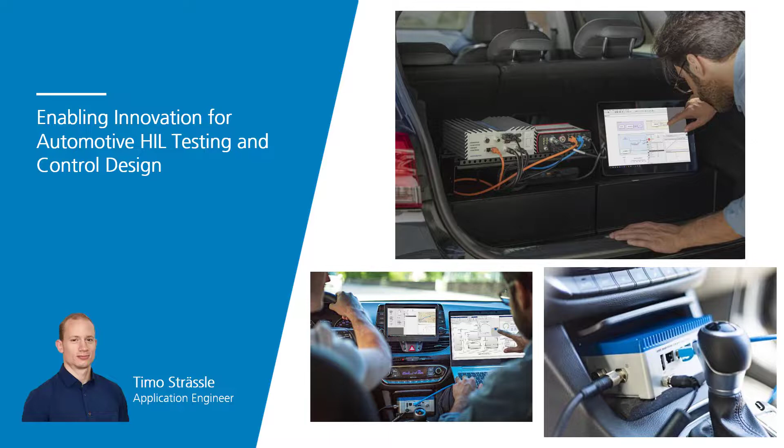Let's start with a great example from the players in the field, which covers many of the topics we want to address today. A brave team of researchers at the Technical University of Munich is developing fully autonomous all-electric race cars with breathtaking performance. A Speedgoat mobile machine serves as the vehicle electronic control unit, or ECU, doing sensor fusion, highly performant motion control and monitoring of the vehicle components.

The cars are powered by 4 electric motors, requiring precise control to tame the combined force of over 500 horsepower. But test time on the racetrack is extremely limited, and the team needed to verify their algorithms often. They decided to model a complete virtual vehicle digital twin, which runs in real time on a second Speedgoat target machine.

The data exchange between the two machines uses the same CAN interface as on the real car. This means the ECU doesn't see any difference between the real vehicle and the digital twin. Furthermore, the team created a virtual representation of the racetrack from sensor data. Co-simulation of Simulink Real-Time with the Unreal Engine for visualization enabled fully virtual testing of the complete software stack for sensor fusion and motion control in real time.

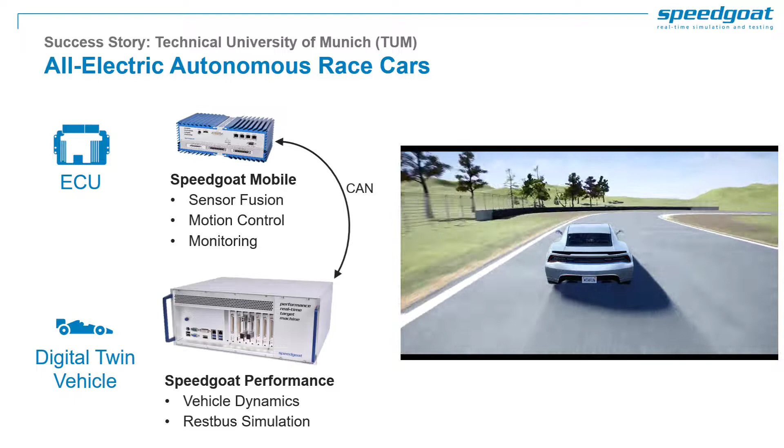With this hardware-in-the-loop, or HIL, setup, the team could evaluate design iterations quickly and test edge cases, emergency procedures and hardware failures in a safe environment. When they finally took the car to the racetrack for in-vehicle testing, they could focus on fine-tuning and verification.

With Speedgoat hardware and the model-based design workflow, the team was able to win multiple competitions, like the Human plus Machine Challenge in Berlin, and the fully autonomous race car already achieves lap times on the level of an amateur human driver.

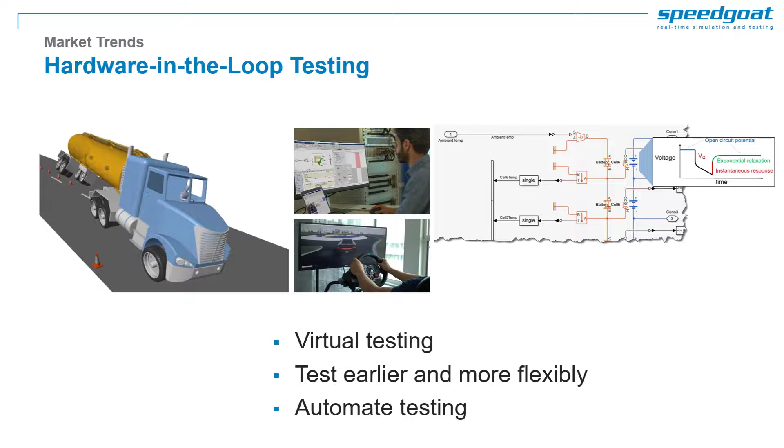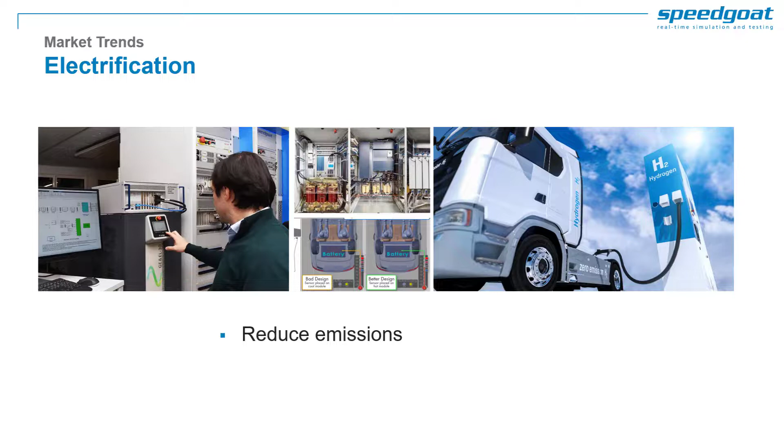Second, there is an increased trend of electrification. With the need to reduce emissions and transition to sustainable energy sources, electric vehicles are becoming more and more popular. Electric motors also provide great efficiency and performance. This comes with the need to develop and integrate new technologies, such as electric powertrains and battery management systems.

The third and final topic we will focus on is the trend towards automated driving. New sensing and processing capabilities can make driving safer, improve driver and passenger comfort and the traffic flow. But there are strict certification requirements to be met, which further increases the need for extensive testing and verification.

Of course, new technologies always come with a lot of challenges. These include the integration of new technologies into existing workflows, modeling complex systems for simulation, interfacing the simulation with real hardware, and meeting all the safety and reliability requirements.

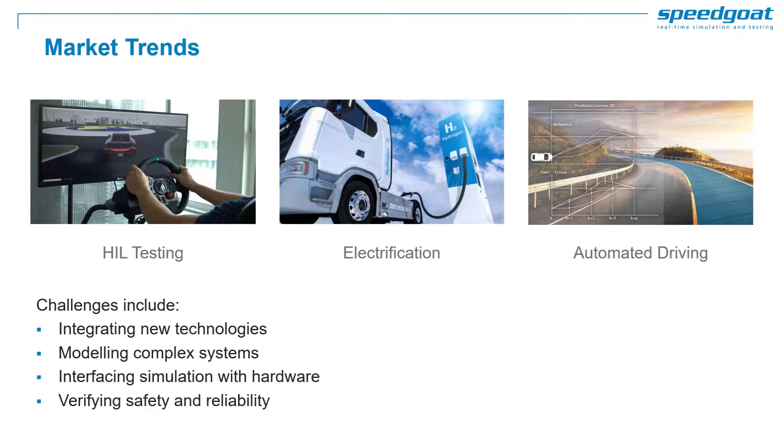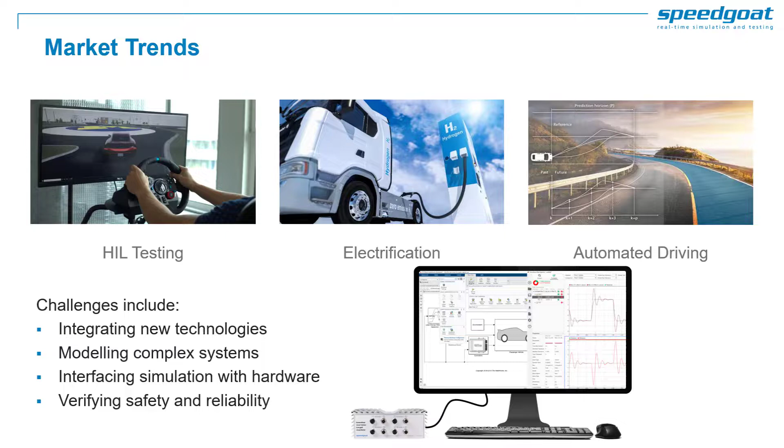So in summary, you want a unified and intuitive solution, which allows you to start quickly and reuse your investments throughout development. Together, Speedgoat and MathWorks provide such a unified solution, allowing you to address all these challenges using one integrated toolchain.

Our real-time simulation and testing platform simplifies your workflow and lets you design and test better controllers and plant models faster. You can innovate and are not constrained by embedded testing environments or the hassles of integrating solutions. Benefit from a plug-and-play real-time solution that shields you from interoperability issues. Experience the unity of simulation and testing with real-time target hardware, all directly from MATLAB and Simulink.

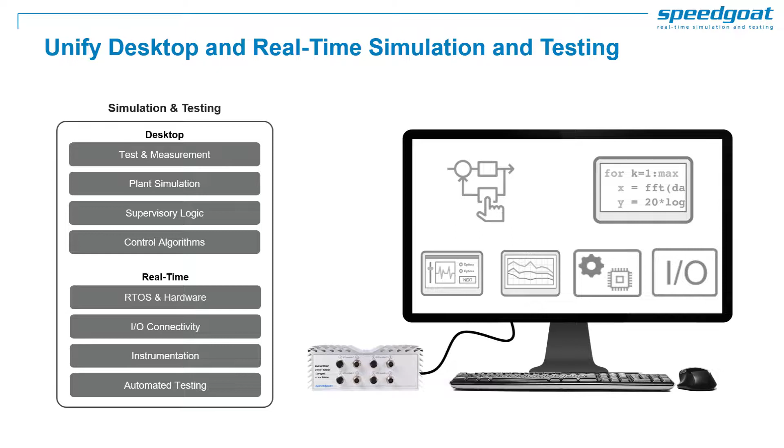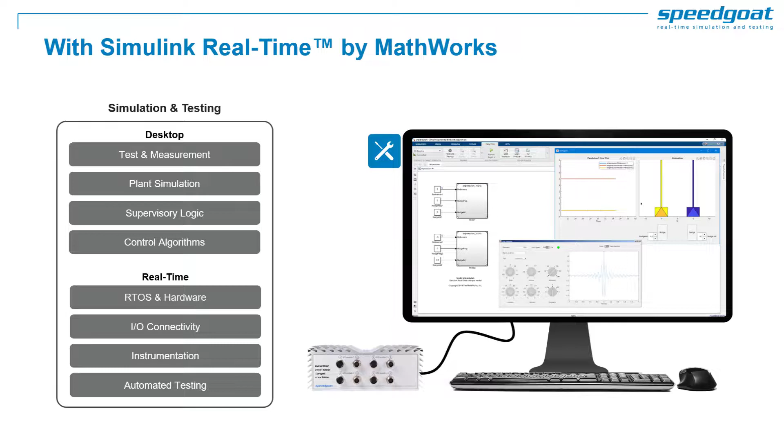The seamlessly integrated solution is composed of two main components. The first is Simulink Real-Time, the solution for real-time test and simulation from within MATLAB and Simulink. It comes with several host capabilities that allow you to easily create, control and monitor your real-time applications, and it serves as your real-time operating system. The second component is powerful and scalable Speedgoat real-time target computer hardware, equipped with I/O. The real-time application created from your Simulink model runs on it together with the Simulink real-time operating system.

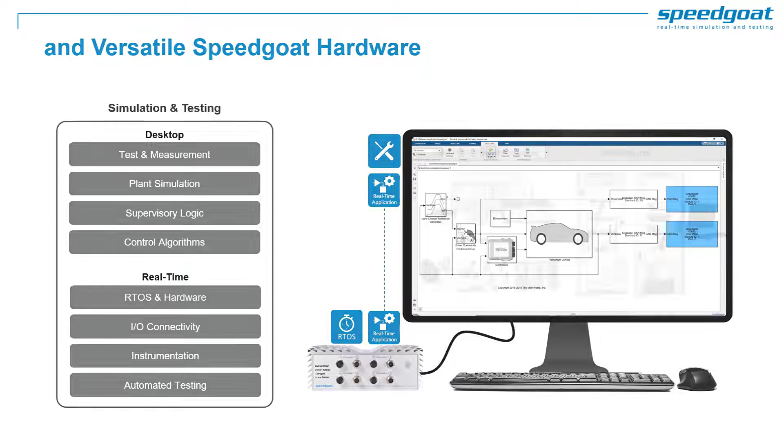How can your development process benefit from real-time simulation and testing? You typically want to get from an early design idea to deployment in production. As a simple example, let's say you design a cruise controller for your new electric powertrain. If you design the controller in Simulink, you easily perform desktop simulation. But for the best results, you should also test it against a real plant.

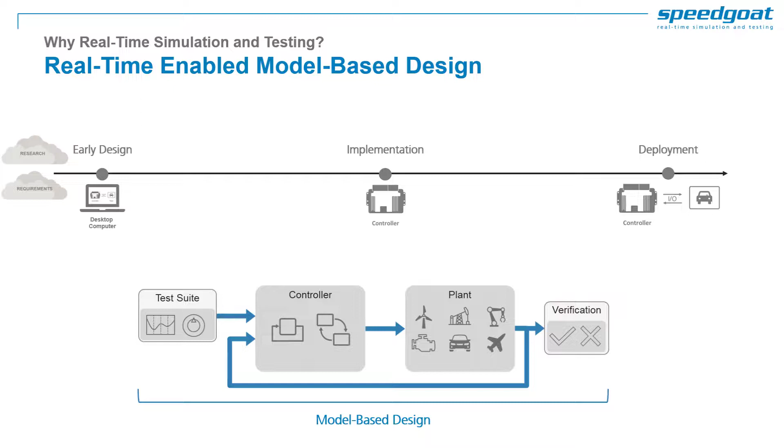And you can do so with real-time testing for RCP, short for Rapid Controller Prototyping. From your Simulink model, you generate a real-time application and deploy it to a Speedgoat target machine. Our Automotive I/O modules let you connect the target machine to the real plant, such as a prototype car or motors, to test and tune your algorithm.

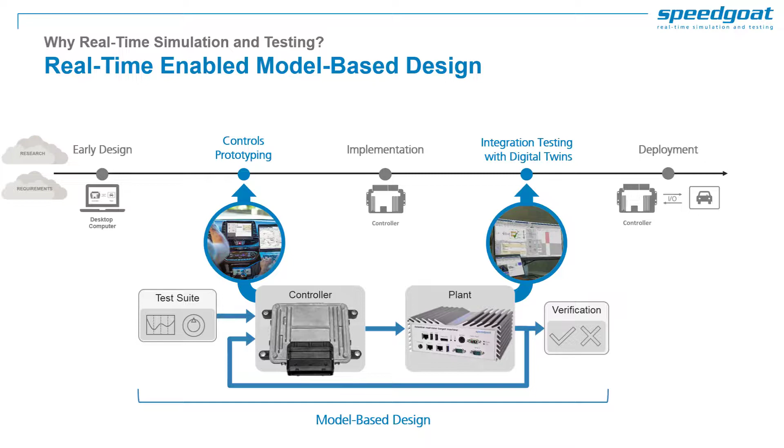Once you have tuned and verified your controls, you could use Embedded Coder to generate the embedded code for your ECU from the same model. To test the ECU, you can then perform hardware-in-the-loop testing, using the real-time target machine again. You run a real-time digital twin model of your vehicle and test the ECU against the virtual plant.

Speedgoat offers a wide range of real-time target computers. Benefit from the greatest power and flexibility with the performance machine. It allows installing up to 50 I/O modules for the highest flexibility, ideal for complex tasks like multi-cell battery emulation, power hardware in the loop, or high-fidelity powertrain simulation. The performance machines are also designed for rack mounting.

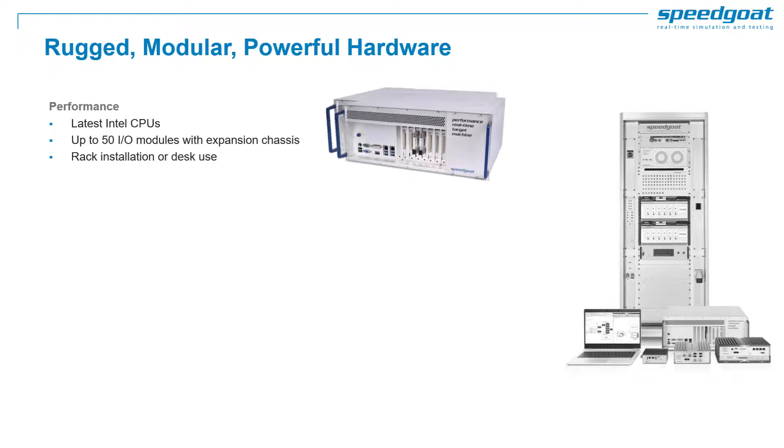The mobile, baseline and unit machines are ruggedized and therefore ideal for in-vehicle testing. Depending on your compute tasks and I/O requirements, you will find an excellent trade-off between compact form factor, power and flexibility, while allowing for modular I/O expansion. The installed I/O modules are configured directly in your Simulink model, using the Speedgoat I/O block set, ensuring a seamless workflow.

No matter whether you are prototyping control strategies or testing controllers against your digital twins, connectivity shouldn't be a hurdle for you. We support key protocols from automotive and other industries, such as CAN and FlexRay, serial protocols, PWM generation and capture, and battery cell emulation. More than 200 I/O modules are available and ensure that your workflows remain uninterrupted.

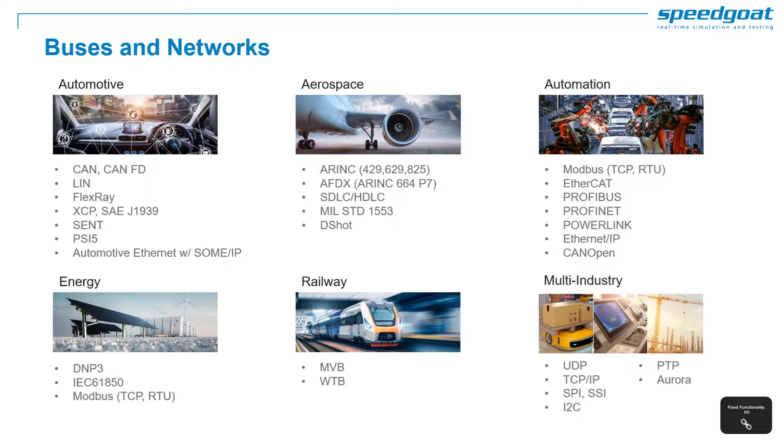Now let's look at the application side of things. In the next two chapters, we'll cover hardware-in-the-loop testing and rapid controller prototyping. I explained with this illustration that RCP means testing your controls in real time against a real plant, and HIL means testing your embedded controller against a real-time plant model.

But it's not always just about RCP or HIL. Today's systems are way more diverse. So we'll touch on use cases such as ECU bypassing and calibration, auto-tuning your control parameters, as well as power hardware in the loop, modeling and simulation of electric, hybrid or fuel cell powertrains, and restbus simulation. Let's focus on the HIL workflows first.

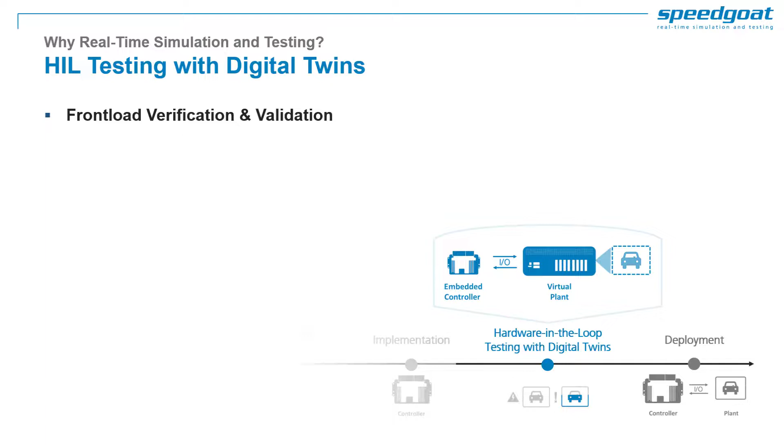Front-loading verification and validation tasks is commonly the main motivation for HIL testing. It may be that the hardware prototype is not available, or you gradually integrate components. You want to resolve design flaws and test edge cases in a safe environment.

What do you need for HIL testing? Well, certainly a platform that runs your plant in a deterministic manner while being connected to sensors and actuators. That allows for plug-and-play interfacing and test automation. Ultimately, this will help you deliver embedded software faster and with lower risk.

So how could such a HIL setup look for your application? Depending on your requirements, setups can range from a single target machine to complete HIL racks. Let's look at an example.

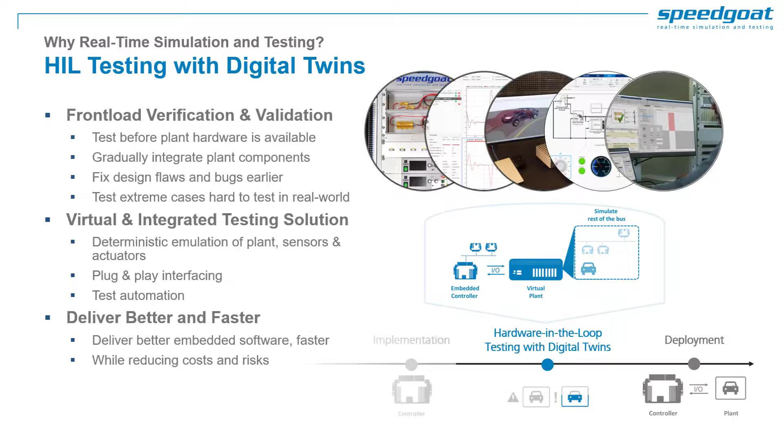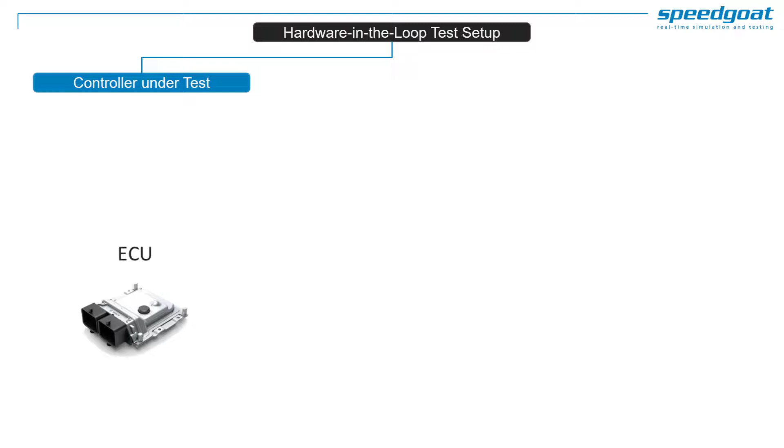There are two components involved in HIL testing. First, your controller under test. This includes both the production hardware and the embedded software. And second, a HIL test system.

The HIL system is composed of a real-time simulator that runs a digital twin deterministically, together with I/O modules that ensure low latency data acquisition, signal conditioning, and communication with the controller under test. The host computer runs dedicated application software that supports you on the setup and operation of the real-time simulator.

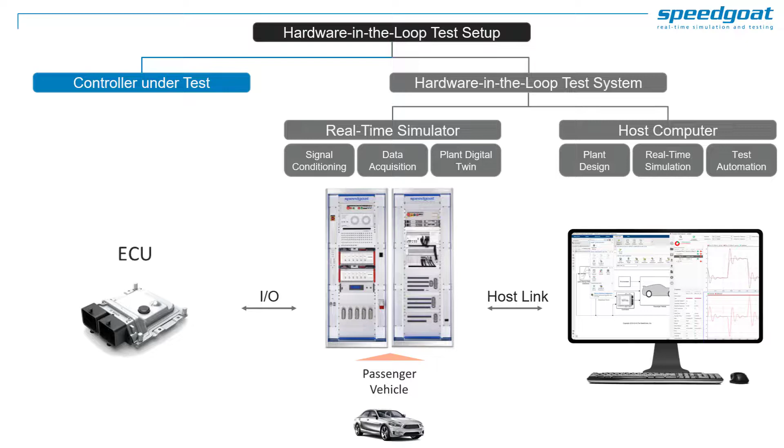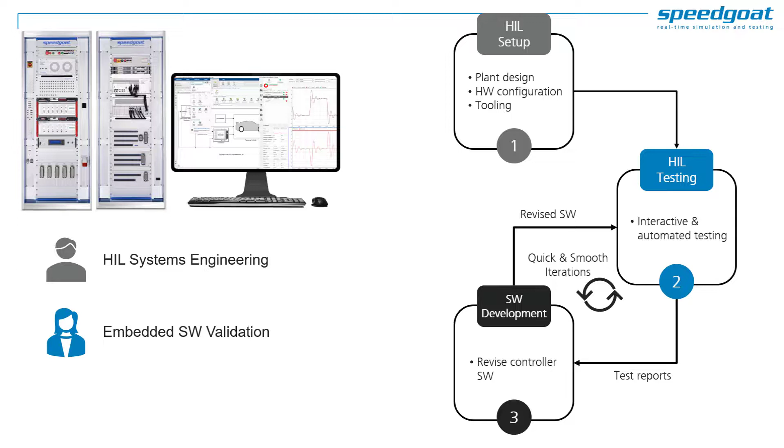Depending on the size of your group and how you organize development of embedded software, the HIL system setup and controller HIL testing can be done by the same or different teams. Let's assume our embedded system group is segmented into three: the HIL systems engineers focusing on assembling and setting up a new HIL test system, the embedded software validation team in charge of running embedded software test campaigns, and the embedded software development team, tasked to develop and revise the embedded software. So the question is, how are we enabling these teams to succeed in their specific tasks?

The systems engineers have previously built a HIL test system based on the Speedgoat performance machine. They are now challenged to specify a new, much more complex HIL test system, required to integrate high-power actuators and electronic loads and sources. Implementing such a HIL system is time-consuming and requires specific expertise. With that in mind, the team decided to rely on Speedgoat's know-how to provide them with a modular, rack-mounted HIL solution, customized to their needs.

The final solution looked as follows: two rack-mounted performance real-time target machines, enabling distributed and synchronized simulation across multiple chassis. This setup fully integrates all power electronics components, the required signal routing and conditioning modules, as well as breakout panels and the cabling harness. For the systems engineers, this is a true plug-and-play solution.

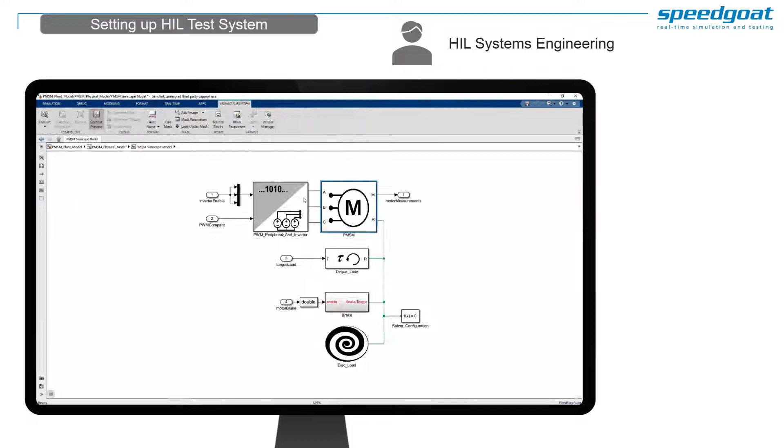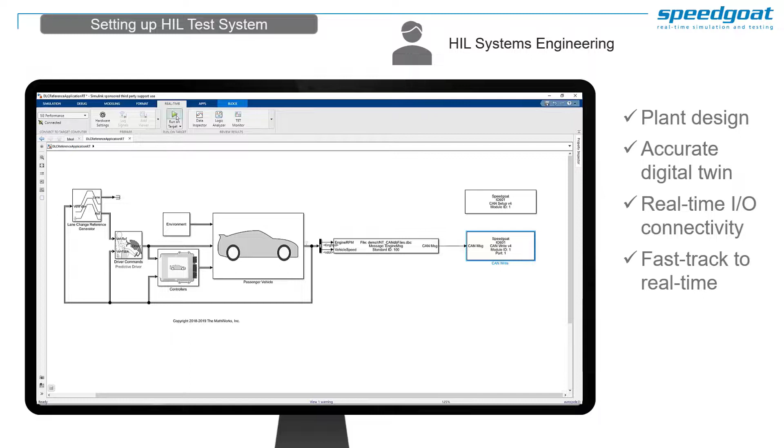With hardware hurdles off the table, the team was able to focus on the design of the digital twin and even introduced some innovations. For instance, model parameters are now automatically fine-tuned to fit measured data. Connectivity with the controller was also done very quickly, with simple drag and drop of Speedgoat driver blocks. Using Simulink Real-Time, the model ran on the Speedgoat machine with a simple click, and the team could verify correctness of all interfaces right from Simulink.

The HIL system was instrumented with MATLAB's built-in app designer. User interface controls directly connect with the real-time application, allowing HIL system operation to be Simulink independent.

In parallel, the software validation team has been creating scripts to batch and optimize test workflows. Part of the team has also been using Simulink Test, which has shown to be a great asset. For instance, most of the desktop simulation tests were reused in the real-time runs. Real-time test campaigns were triggered with a few clicks, and the assertion of results was fast and easy using inbuilt visualization tools. Besides, detailed test reports could be generated automatically. This greatly simplified communication with the software development team and helped further expediting software revision work.

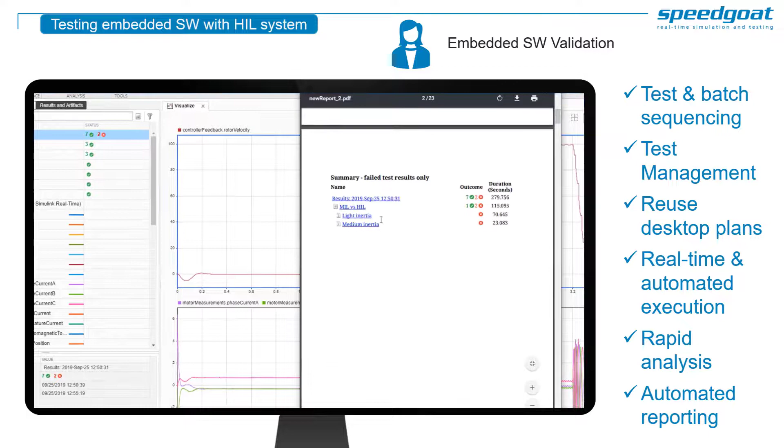So you've seen the customizable hardware, but what about the software? How do you create a complex model like a virtual vehicle for HIL testing? Well, MathWorks and Speedgoat offer various pre-built reference applications to get you started quickly. The foundation for high-fidelity vehicle models is provided by the powertrain block set and vehicle dynamics block set.

With Simscape, you can also add multi-domain physical components to your model, like electrical and thermal subsystems. And with the Speedgoat I/O block set, you configure all the I/O interfaces directly in Simulink to easily send and receive signals.

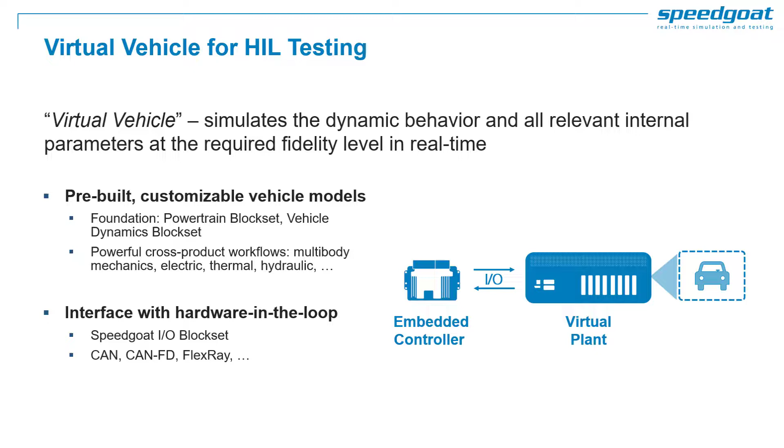But we know you don't always need a complete virtual vehicle model. A key workflow in HIL testing is restbus simulation. It essentially means that part of one or multiple vehicle buses are simulated to facilitate verification and validation of the ECU under test.

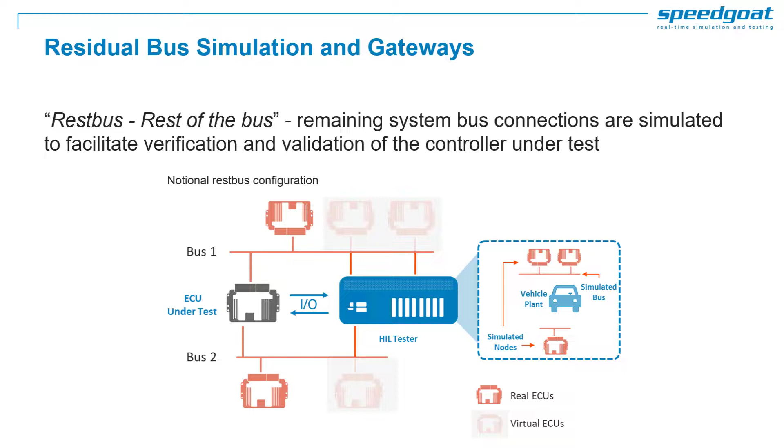Speedgoat offers a complete solution for this workflow based on our Automotive bus simulation I/O module. This configurable I/O module covers all relevant automotive buses, such as CAN, CAN-FD, LIN, FlexRay, SENT and Automotive Ethernet, and it's fully compliant with AUTOSAR requirements.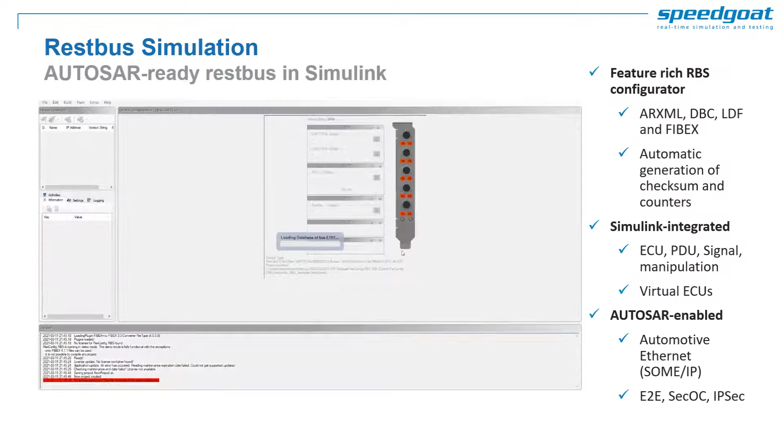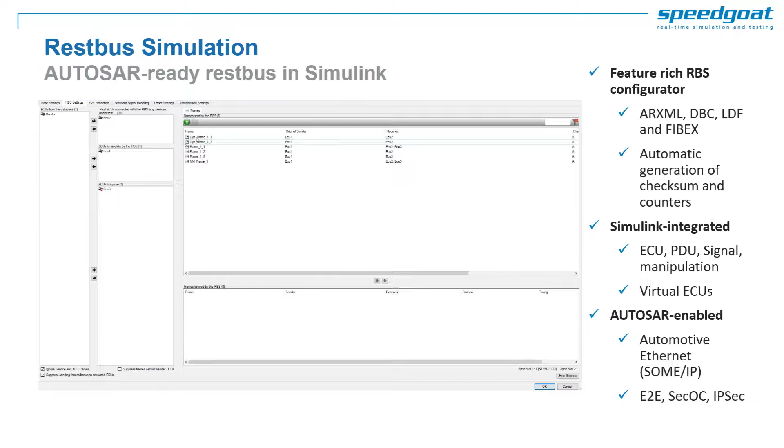This module comes with a fully featured Simulink integrated user interface. With just a few clicks, you can create complex static restbus configurations, including multi-channel bus configuration, automatic generation of bus frame and PDU signals, checksums, and alive counters. Besides, the configuration tool supports all mainstay automotive bus matrices, from legacy DBC to AUTOSAR XML files.

Performing dynamic bus simulation in Simulink is also no longer a problem. The Simulink block set supports all kinds of dynamic restbus operations. For instance, you can quickly manipulate signals, PDUs or complete frames, control execution of the static restbus application, or even switch on and off complete ECUs.

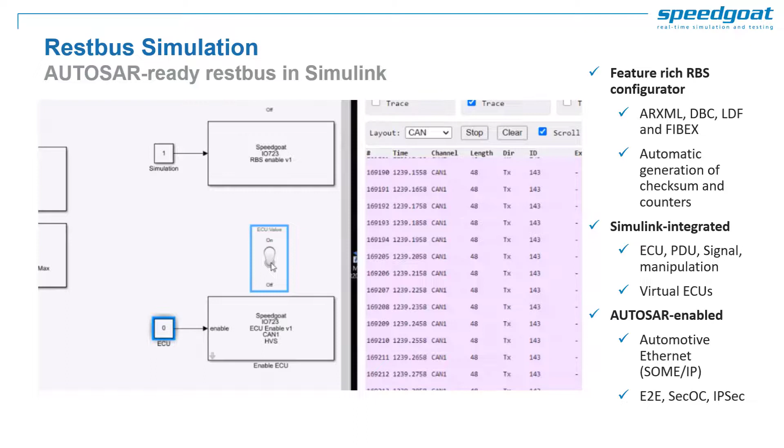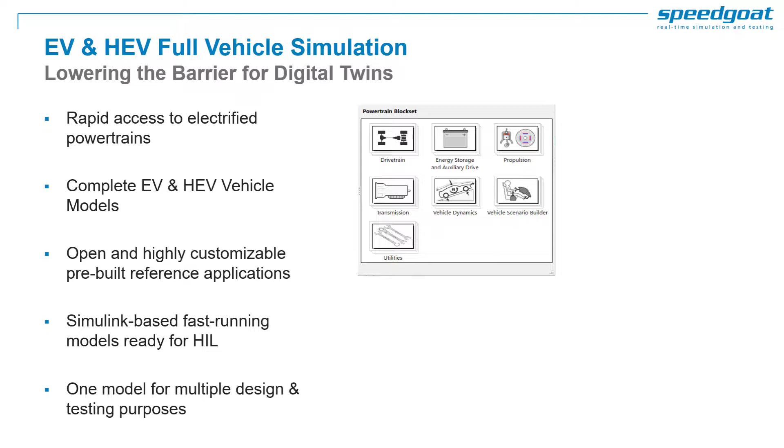Now let's go back to creation of your digital twin vehicle. Powertrain blockset gives you quick access to conventional and electrified powertrain models. The inbuilt libraries provide easy-to-use Simulink blocks, including batteries, electric drives, and electric motor controllers.

Many well-documented and ready-to-use reference applications get you started quickly. These are Simulink-based, very fast-running models that you can fully customize and instrument, and that are ready for HIL deployment and closed-loop simulation with your controls. The same model can be used to support different tasks, like tuning motor and brake controls, designing capabilities such as torque vectoring control, or developing and testing battery management systems.

Let me quickly show you how to access the built-in examples. In the MATLAB documentation here for the powertrain blockset, you just click on examples to see the list of all the pre-built Simulink projects.

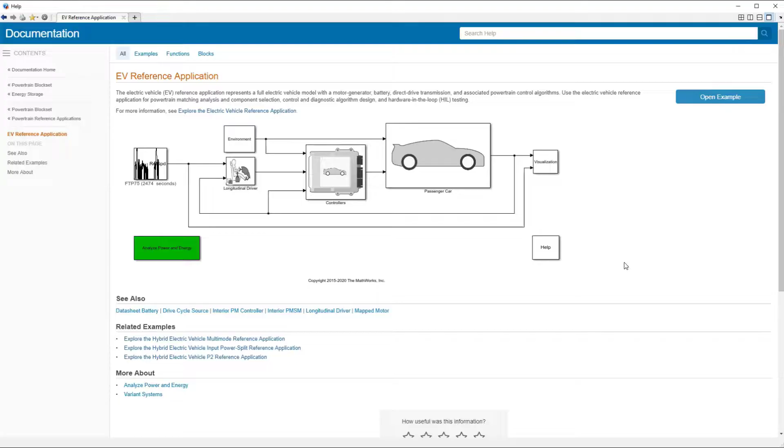I'll just go ahead and open the electric vehicle reference application here. Click the button and a few seconds later the Simulink model opens for you to freely explore, run simulations and customize it to your needs.

With detailed models for all your electric components, real-time testing is also a powerful tool supporting the development of battery management systems or fuel cell controls.

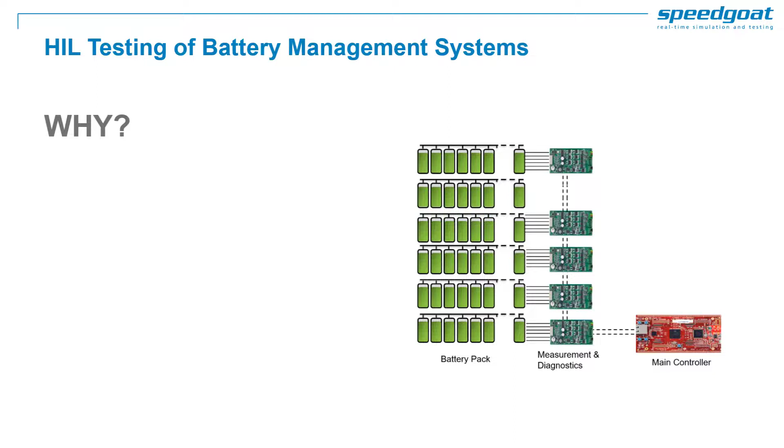There's a couple of reasons why you might not want to test your early prototype algorithm on real power systems. For example, testing a complete charge and discharge cycle on a real battery pack can take many hours. Reproducing design issues and fault conditions can be difficult and raise serious safety concerns. And if the process is lengthy, you wouldn't want to repeat it for every software revision.

Allow me to mention Speedgoat's solution for development of battery management systems. It enables modeling and emulating batteries down to cell level. You can stack several of these modules to build a HIL simulator of a full battery pack, including fault insertion and temperature simulation at cell level.

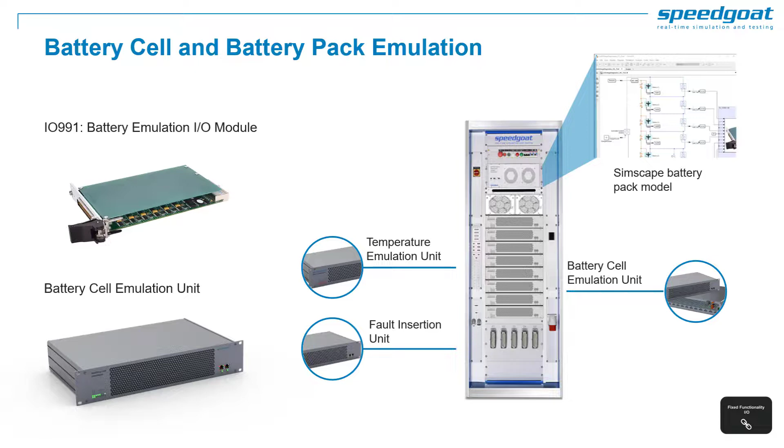Simulink and Simscape provide a wide range of example models for different battery types. For each battery cell, you can also have optional modules to emulate temperature sensors for each cell and to test fault conditions like broken wire and short circuit.

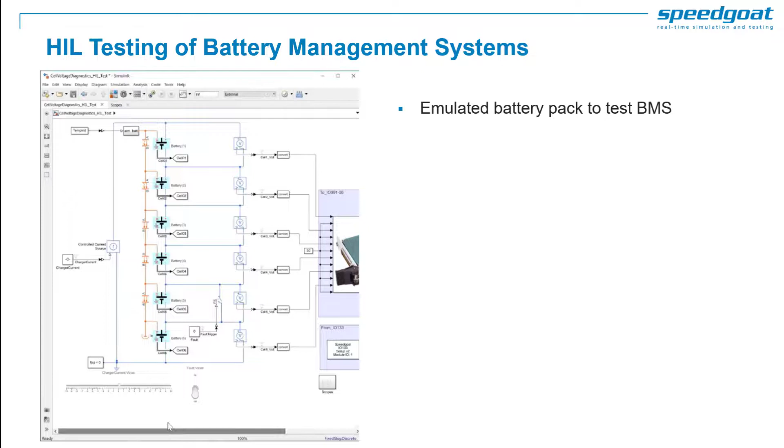Let's take a quick look at the test model, which allows us to simulate battery cells and generate fault scenarios. We have a BMS under test and connected to an emulated battery pack using the battery emulation I/O module. To simulate a fault, we added a switch which allows us to short two cells in simulation without physical consequences.

Additionally, we use a slider to set the charge or discharge current. To perform diagnostics on cell level, we measure the voltage between two cell terminals. The measured cell voltage values are sent to the I/O module, which converts the numerical values into voltage outputs, each relating to an individual battery cell.

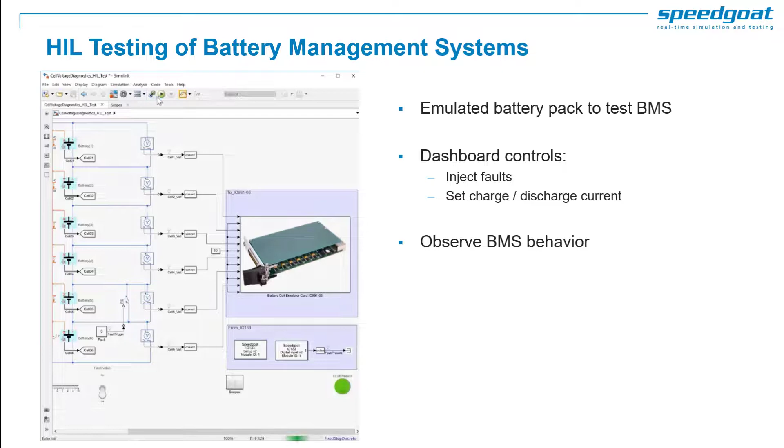The BMS controller performs diagnostics on cell voltages and detects overvoltage or undervoltage faults and short circuits between two terminals. When we inject a short circuit fault, we can immediately notice the red warning light.

Let's look at the results for the whole experiment in the simulation data inspector. We can notice small changes in cell voltages due to the change in current, and one of the cell voltages dropped significantly as we triggered the fault. Using this data, we can optimize the conditions based on which a fault is detected to ensure safe battery management.

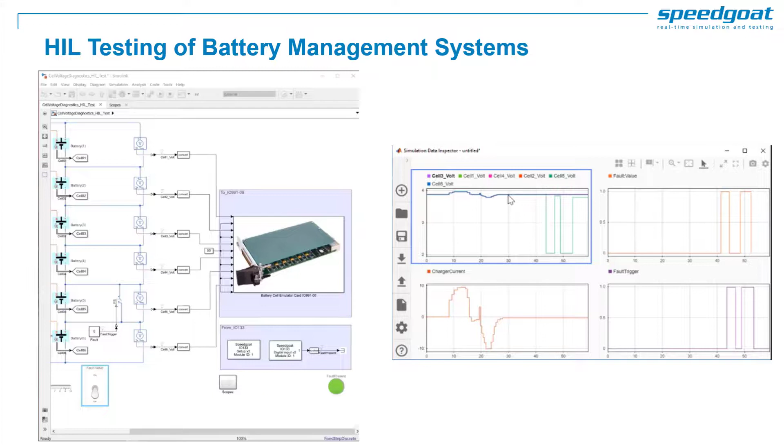Our customer, Leclanché, uses Speedgoat products to develop lithium-ion battery packs for autonomous vehicles. They were struggling to test their BMS in realistic conditions without connecting actual battery packs, leading to late bug discovery and a lot of manual testing.

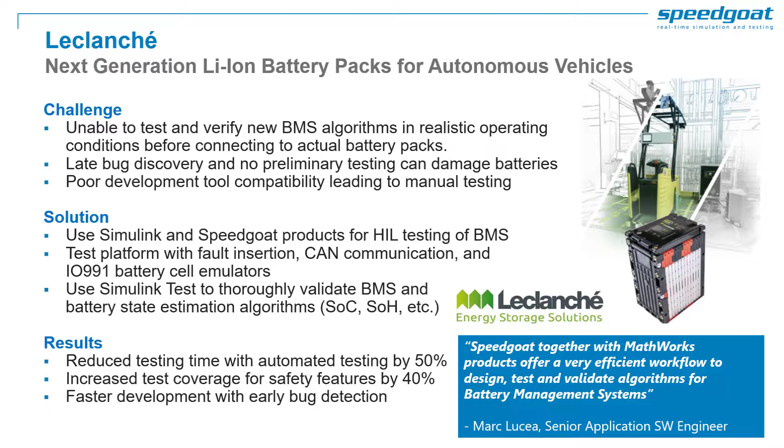With the Speedgoat HIL test bench, they can now emulate battery cells to test CAN communication and validate the BMS and state of charge estimation algorithms. They successfully cut testing time in half and at the same time increased test coverage, leading to faster development and early bug detection.

To model electric and other physical components, you can do physical modeling with Simscape. It allows you to arrange fundamental components into a schematic, which integrates with your Simulink model and fully supports code generation. With physical modeling, you get the highest fidelity simulations for things like batteries, fuel cells, thermal cooling systems, and more. And again, you don't have to start from scratch.

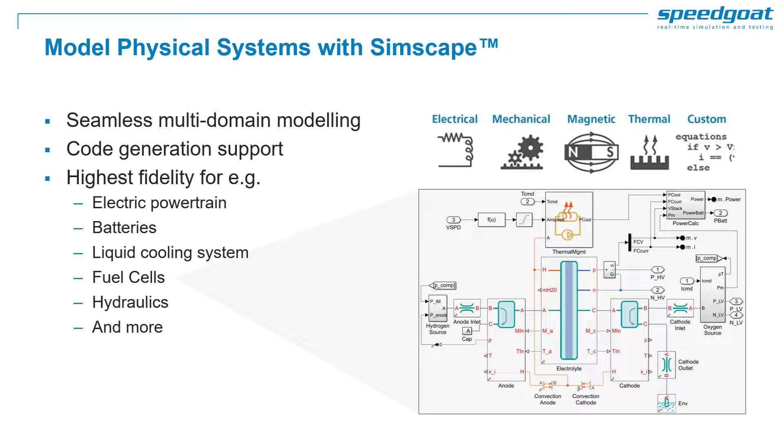For automotive models, the Simscape vehicle templates provide a great starting point. This ready-to-use reference application enables you to easily explore model architectures for conventional, hybrid, battery electric and fuel cell vehicles with Simscape-based subsystems. The user interface allows you to easily switch between different vehicle configurations and find the right model fidelity for your tasks.

Perhaps you are working on battery system design and you would like to analyze the thermal behavior with an active cooling system. All Simscape vehicle template configurations are compatible with real-time execution using Speedgoat hardware and Simulink Real-Time.

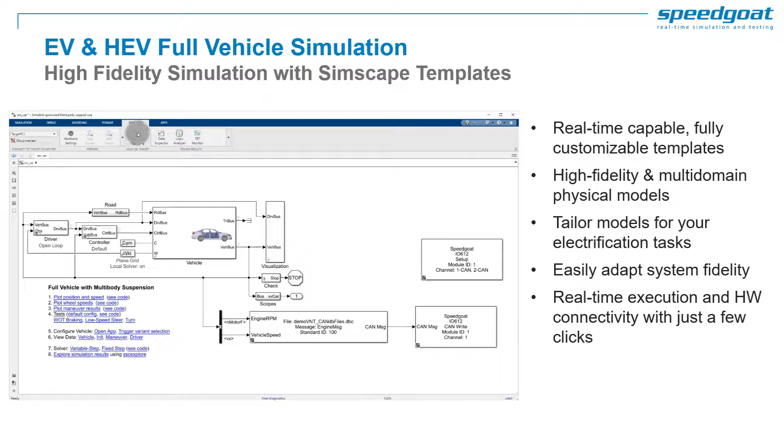Adding hardware connectivity and preparing the model for real-time simulation only takes a few clicks. With the help of Simulink Real-Time, you can perform real-time runs of full vehicle models in seconds and start evaluating and comparing new system designs, test hardware in the loop, size components, and collect data for detailed real-time analysis. You can directly use these models as high-fidelity virtual vehicles to test early prototypes or embedded controllers.

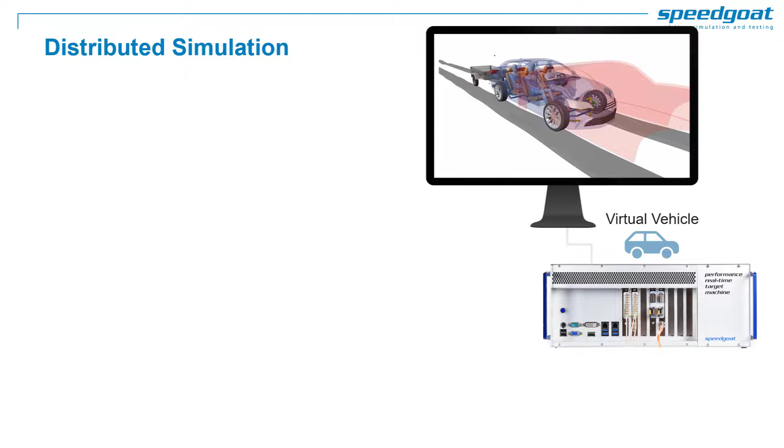Now, the more high-fidelity components you integrate, the more computational power you need to run your model. To achieve your sample time requirements, you might need to run your model distributed across multiple systems. Speedgoat target machines can be interconnected and fully synchronized for distributed simulation. You can leverage shared memory to enable ultra-low latency data exchange, and you can use interrupt signals or clock synchronization to trigger synchronous execution.

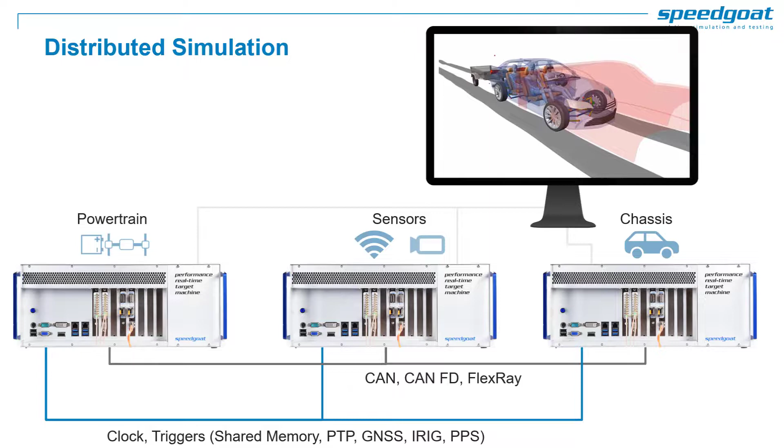The flexible solution allows you to scale the systems to your needs at any time. The technology enables you also to build real-time driver-in-the-loop simulators, which is great when it comes to testing the human interaction with your models. Manual controls allow you to assess things like vehicle handling, the functioning of the connected hardware, and is especially useful for testing the interaction with assistance systems, such as control handover between human and AI.

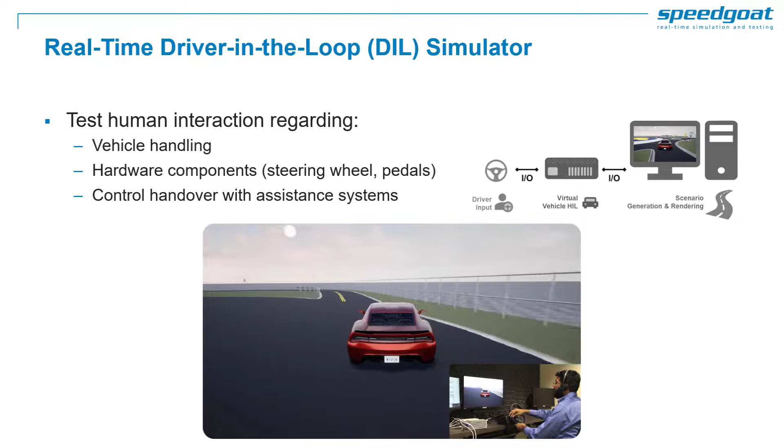Our driver-in-the-loop reference application can be downloaded from the Speedgoat webpage. And there is also a more in-depth webinar from MathWorks on building real-time driver-in-the-loop simulators with Speedgoat hardware. And this concludes the section on hardware-in-the-loop testing.

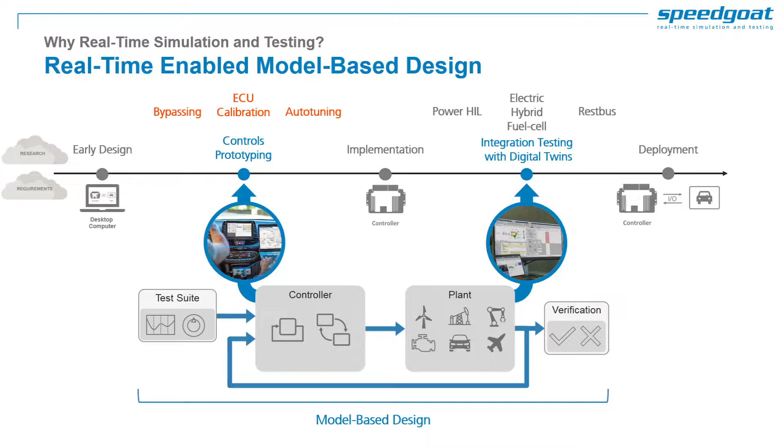Next, let's discuss rapid controller prototyping. As mentioned before, some use cases here are, for example, ECU bypassing or calibration and auto-tuning of your control parameters.

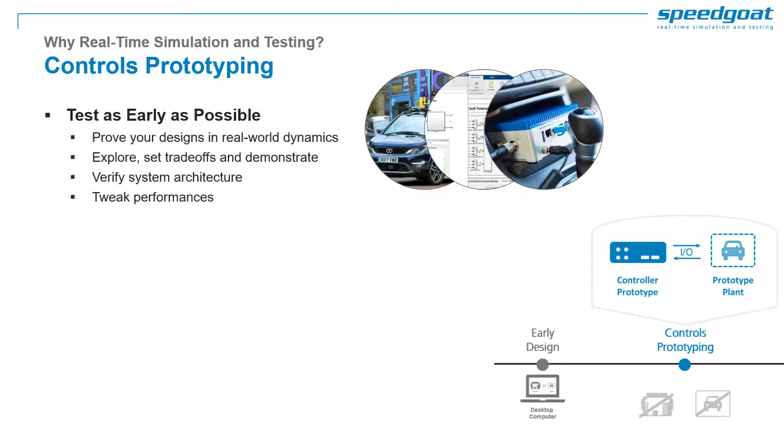Your workflows may deviate slightly, but we think you would agree on the following three main motivations for real-time based controller prototyping. Test early to prove that your algorithms work in real-world dynamics. You may find better trade-offs and tweak performance. I've already mentioned the unified workflow combined with flexible and powerful hardware. This unique combination allows you to worry less when testing.

Ultimately, you can be more innovative, expose design flaws earlier, and shorten time to market. But we know you rarely design controllers independently and from scratch. Typically, you take into account already existing infrastructure. You might want to rework only specific components of an already existing ECU.

Or perhaps you are in the middle of a test and integration campaign and you need to rapidly modify parts of the embedded design while avoiding the lengthy embedded software iteration process. In this case, you can utilize Speedgoat for bypass rapid prototyping.

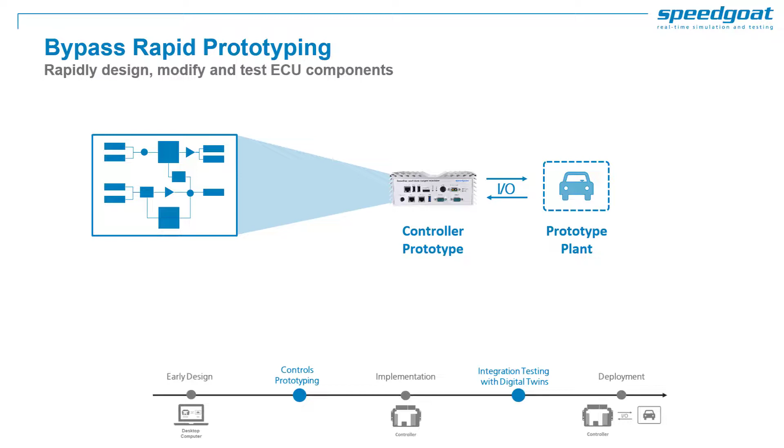Unlike in full-pass prototyping, where you would virtualize your full controller using the Speedgoat target as a prototype controller, with bypassing, you only run specific parts of the software on target hardware, for instance, a modified design that you created in Simulink. Deterministic real-time behavior between bypassed and embedded components is achieved by establishing a bypass service with hooks and data links using the universal XCP protocol.

This enables the ECU to send input data to the Speedgoat bypass unit through a data acquisition link, and the other way, signals are sent to the ECU through a signal injection link.

In early design stages, bypassing allows you to rapidly prototype and test new function designs without being limited by the embedded hardware. So you can implement development stages with higher confidence and guarantee that your design choices will fit the embedded environment. During integration, bypassing allows you to rapidly introduce and test late design changes while minimizing the effort of software revisions. In summary, bypassing helps de-risking and speeding up development stages.

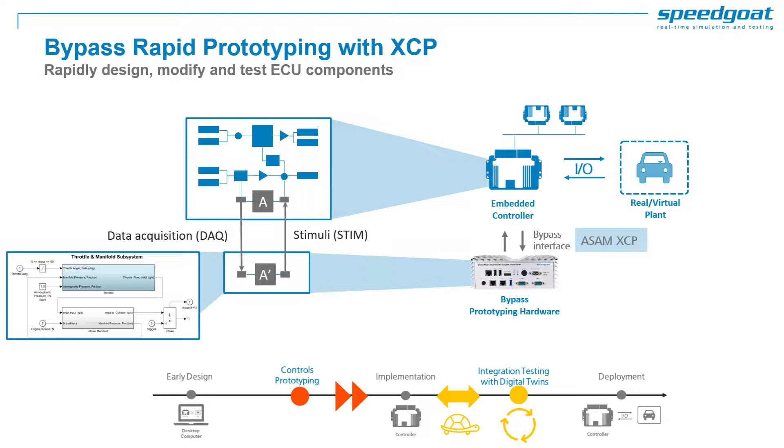The XCP protocol is also commonly used in the automotive industry for ECU measurement and calibration. With Speedgoat prototyping solutions, you can perform measurement and calibration of early controls directly with your real-time target machine. You can do this either directly from within Simulink as already shown, or by using a third-party tool of your preference, such as CANape by Vector or INCA by ETAS. Let's have a look how things actually play along inside Simulink for bypassing and calibration.

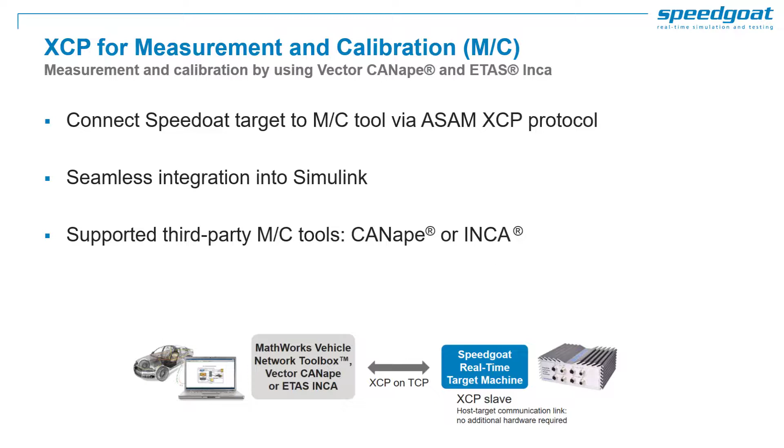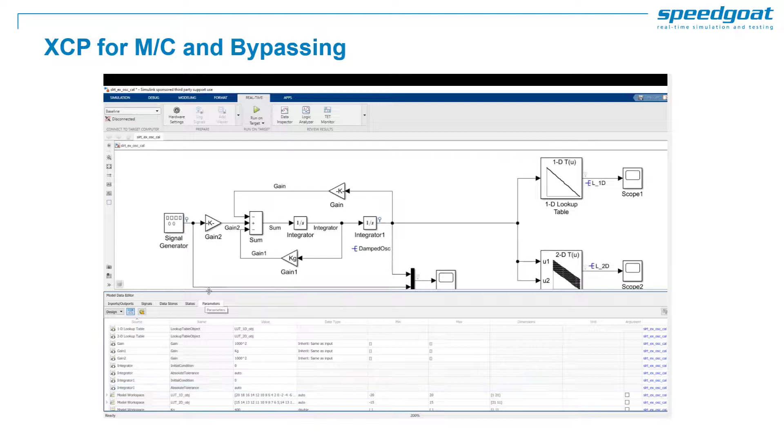Let's start with a measurement and calibration use case using a simple model of a damped oscillator. This model contains several tuning parameters, including 1D and 2D lookup tables that invert and rescale signals. Our goal is to calibrate these parameters using the Inca tool instead of Simulink Real-Time.

When we build the model, Simulink Coder automatically generates a description file, known as ASAP2 or A2L file. This file basically maps all observable and tunable parameters of your model. In Inca, you simply need to import the A2L file, and with a few clicks you can start monitoring signals and tune model parameters in real time.

Let us now switch to the bypass use case. Remember, in this case the Speedgoat no longer acts as a slave device. Instead, it plays the role of a master device that actively reads and overrides signals of the ECU under test. Speedgoat and Simulink Real-Time enable this capability through dedicated block sets that allow you to run XCP master over CAN and UDP transport layers.

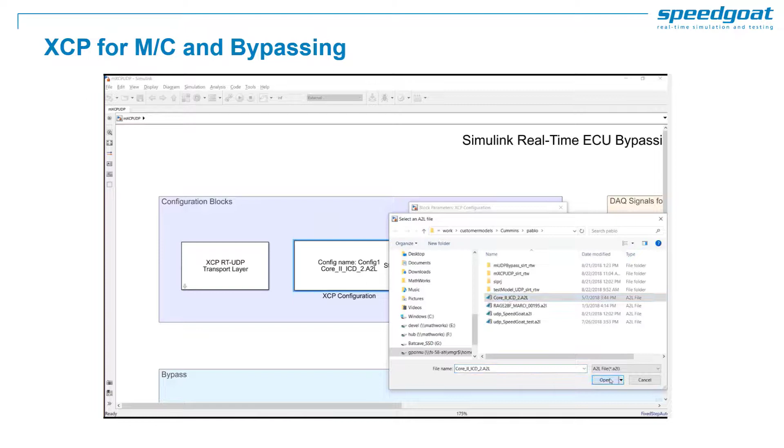We start by defining the transport layer, which in our case is going to be UDP. Since we are now acting as XCP master, we will import the A2L file from the ECU. You can then start configuring the data acquisition lists to read data from the ECU and stimuli lists to override signals on the ECU. In our example, we will run a simulation for 2 ECU sensor signals.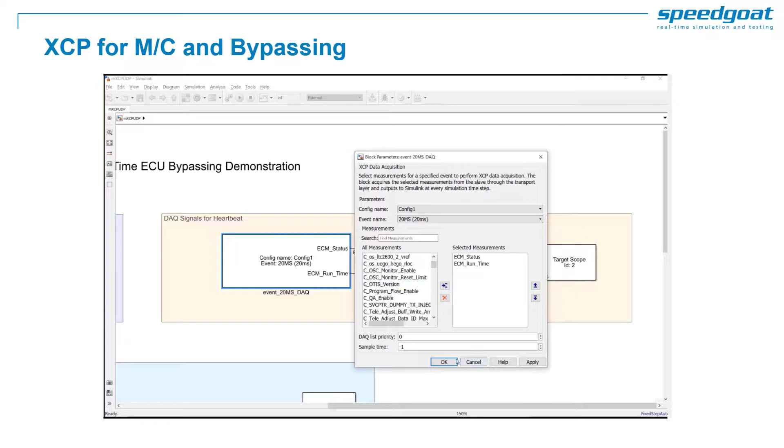With our unified workflow, we can enable bypassing directly from Simulink using a simple switch, and modify values written to the ECU during runtime of the application using a slider widget.

During the HIL section, I mentioned how you can test your controller against a simulated plant model. But to identify the real motor parameters and fine-tune your controller, you also need to interface with the real electric motor. The complete workflow of RCP and HIL for electric motor control is illustrated in the Speedgoat electric motor control reference application.

It comes with all the hardware required for testing: a baseline real-time target machine with a Simulink programmable FPGA, a 3-phase inverter, and a brushless DC motor. With this simple setup, we can replicate the exact same workflow you would use to tune your electric powertrain controls.

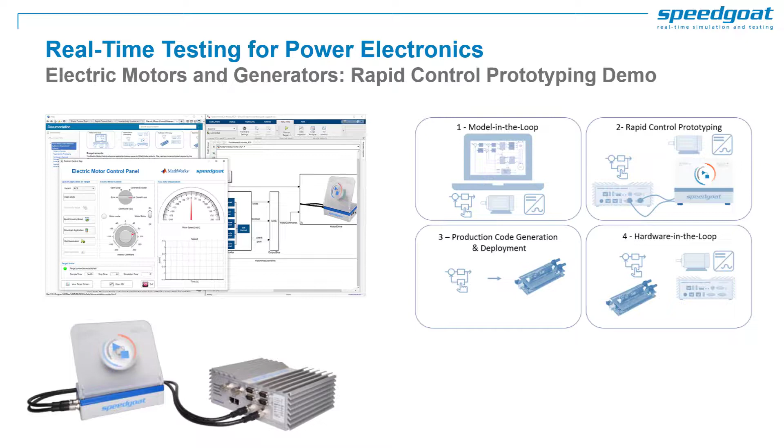For rapid control prototyping, directly connect your real-time application to your electric motor drive with flexible PWM and other digital outputs. You can read back position, speed, voltage, current, and temperature signals. The reference application comes with fully documented workflow examples for designing, testing, and tuning closed-loop control.

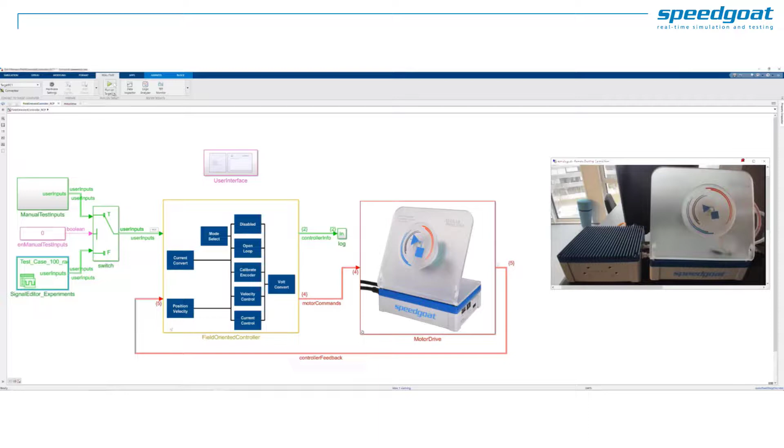Let's quickly check out how you can control a real-time application directly from within Simulink. Connecting to the target and starting the application just takes a few clicks. When the application is running in external mode, we can change parameters and the changes will take effect immediately.

For example, let's switch the control inputs to manual user control. With dashboard controls inside Simulink, we can now set the motor speed and also view the logged data.

The same functionality can also be achieved with standalone apps built with MATLAB App Designer. These allow you to interface with the real-time application without even opening Simulink. You can download this reference application in the Knowledge Center section of our homepage.

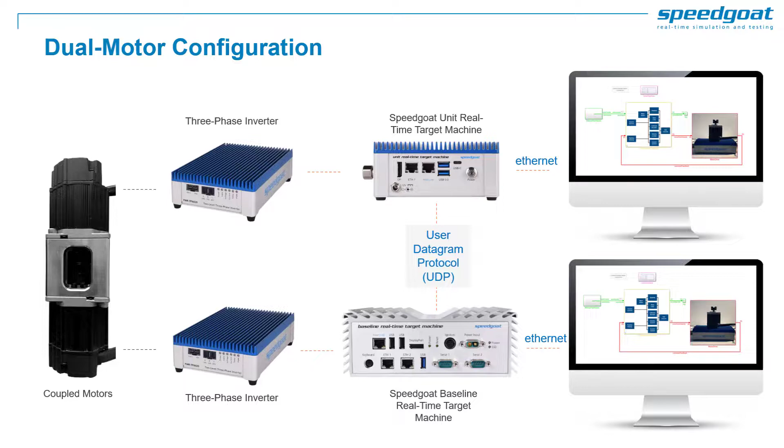So we covered low-level control of the actuators, but what about high-level decision-making? This leads us into the area of assisted and automated driving. Rapid control prototyping is also a crucial tool here.

From a 3D visualization, you can generate artificial sensor data, or you can inject previously recorded data to test your controller in real-time simulation. This enables you to test the robustness of assistance systems during development. Let's look at some examples here as well.

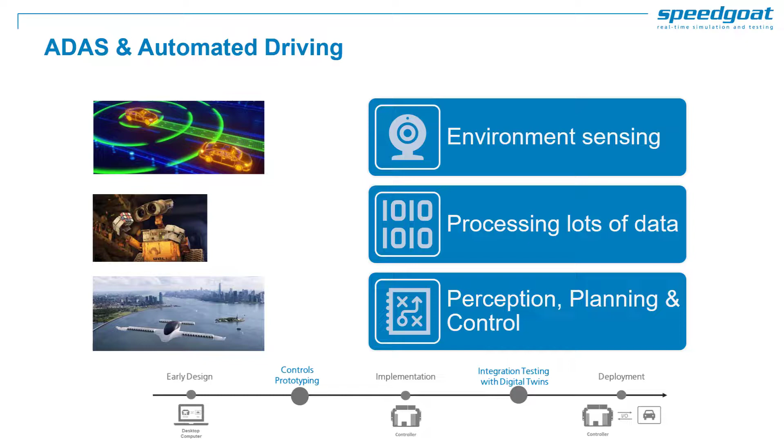Our reference application for real-time lane keeping assistance shows the strength of model predictive motion control. To enable closed-loop control, camera images are generated from simulation and injected into the system for real-time lane detection.

This example uses two real-time target machines interconnected via CAN and UDP. The performance machine runs the lane detection and vehicle dynamics, while a baseline handles the MPC controller. The 3D rendering is done on the host computer.

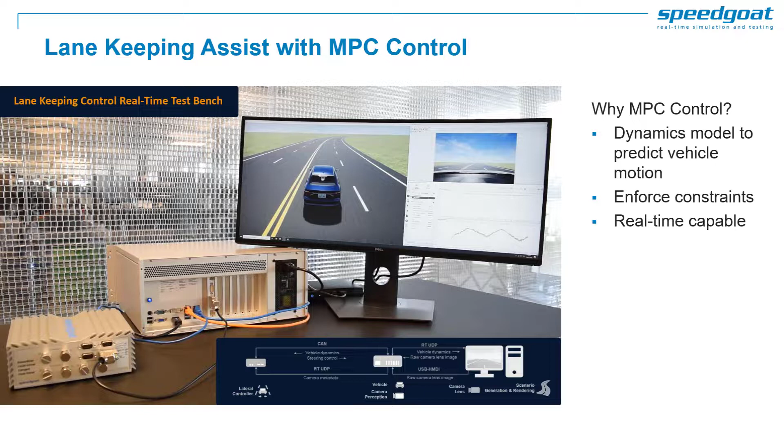Here you can see this example running in real time. Model predictive control proves very powerful in automotive applications. It uses a vehicle dynamics model to predict vehicle behavior and ensures smooth and predictive driving. It also allows you to enforce constraints like maximum steering angle. By trading off the prediction horizon and complexity of the dynamics, it can be optimized for real-time performance. MathWorks Model Predictive Control Toolbox natively supports code generation for real-time execution.

With MPC Toolbox, you can design controllers from scratch or use available library blocks. Here you can easily define the vehicle parameters for prediction, as well as the control parameters like constraints and the prediction and control horizon.

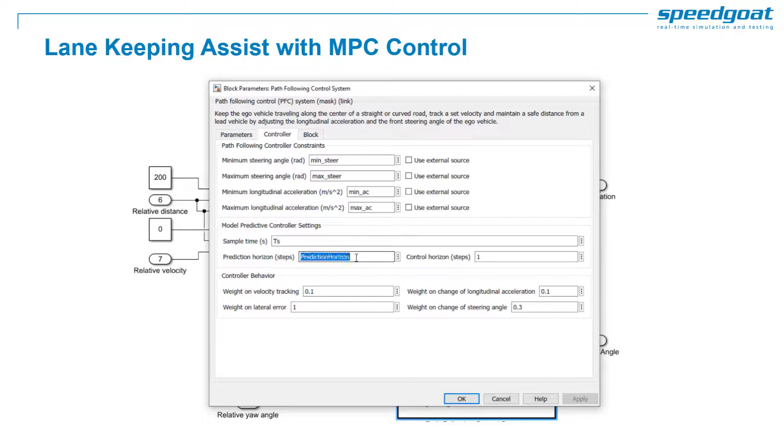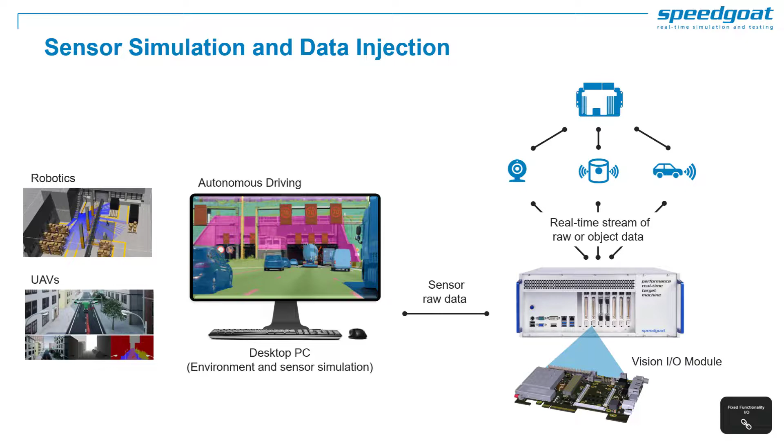Perhaps you would like to inject sensor data, either simulated or logged physical signals, into LiDAR, radar or camera-based sensors, or validate perception functions. This is not a problem. You can combine Simulink and Speedgoat HIL systems to generate raw sensor data or object lists directly from synthetic scenarios, and then stream this data over sensors and controller-specific interfaces, for instance using Vision and Ethernet-based I/O modules.

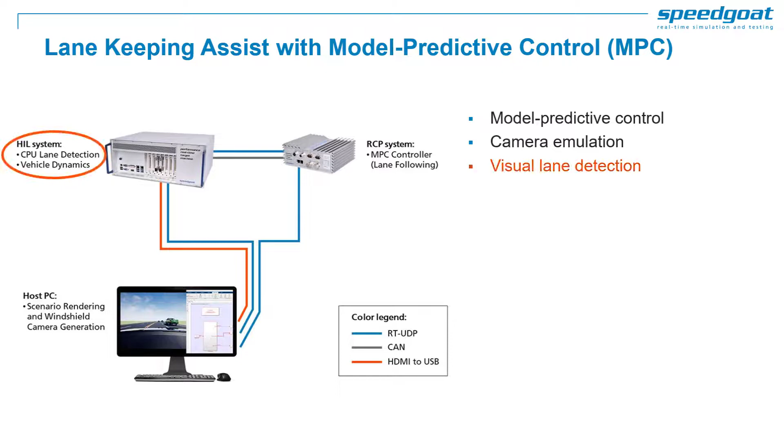Going back to our lane keeping example, we can also address the limitation of vision processing running on the CPU. Detecting lane markings from high-resolution camera is critical, but computationally very intensive. To meet real-time performance at the camera rate of 60 frames per second, we need hardware acceleration. FPGAs provide deterministic, massive parallel computational power with very low latencies, and Speedgoat provides direct vision interfaces to the FPGA module.

Using our Vision I/O module, we have prototyped an FPGA implementation of the lane detection algorithm. At the right frequency, this allows us to process the full pixel streams from a 1080p 60 frames per second camera. Vision HDL Toolbox enables you to implement FPGA vision algorithms in Simulink, and with HDL Coder, you can then automatically generate HDL code from the model.

On speedgoat.com you can find more information and access our reference application for lane detection on FPGAs.

To verify this FPGA algorithm, we integrated it into our driver-in-the-loop setup together with MPC lane following and added a functionality to switch between manual controls and the lane following controller. An indicator shows the availability of the lane keeping system based on the confidence in the lane detection and curvature of the road. This nicely illustrates how you can test assistance systems in a safe environment.

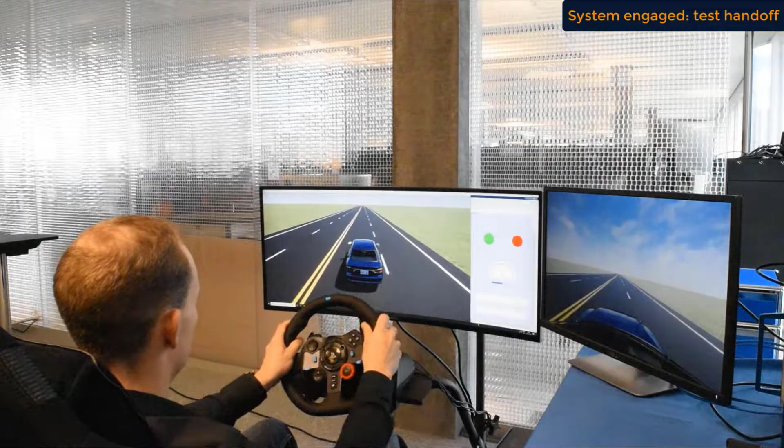And this concludes the section on rapid controller prototyping. Before we start with the Q&A session, let me give you a brief recap of the powerful workflows we saw today.

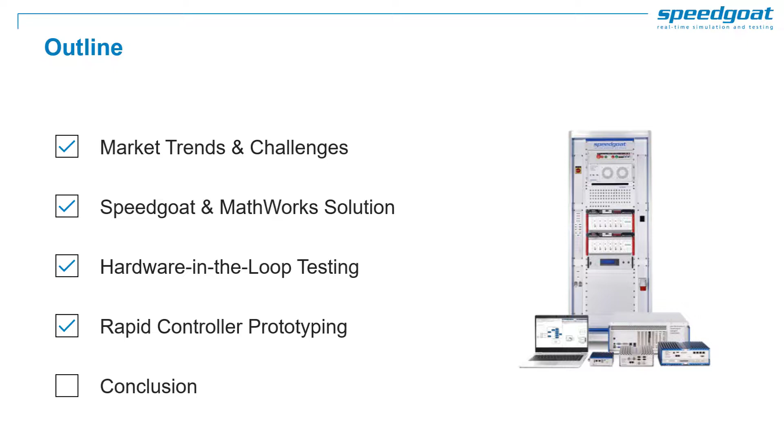With the Speedgoat I/O block set, you quickly define your I/O interfaces directly in Simulink. With automatic code generation, you easily turn your Simulink model into a real-time application. You deploy and run the model in a few clicks and interface with the simulation and tune parameters at runtime. And you can perform extensive data logging, analysis and visualization easily with native MATLAB and Simulink tools.

Speedgoat hardware is the recommended solution by MathWorks for real-time simulation. Our close collaboration ensures that all the latest features are tried and tested with Speedgoat hardware upon release. This means you don't need to switch to third-party tools during your workflows. The support teams from MathWorks and Speedgoat also work together closely to provide a seamless experience tailored to your needs.